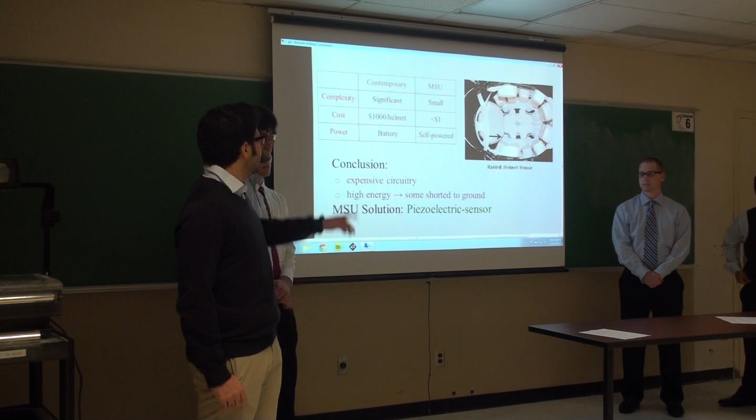Complexity in terms of contemporary versus MSU is very significant, so it's hard to design it and it's hard to maybe analyze it sometimes. MSU's technology is very small and tiny, it's easy to design. In terms of cost, the contemporary is $1,000 per helmet, which is huge. Compared with MSU technology, which is just less than $1, which is a huge difference between both.

And then in terms of power, contemporary uses a battery for power, and this is a negative side because these concussions happen in a short amount of time, and this battery gets leakages. There's more risk of leakages because the acceleration impact increases, and that leads us to high energy. If it's very high, the energy gets shorted to ground.

If you compare it with MSU, it's self-powered. It gets its power from the concussions, and whatever energy is left is just stored. So there is no energy leakage. So that leads us to present the MSU solution, which is piezoelectric sensors. So what does the word piezoelectric mean? The word piezo comes from the Greek word piezein, which means pressure.

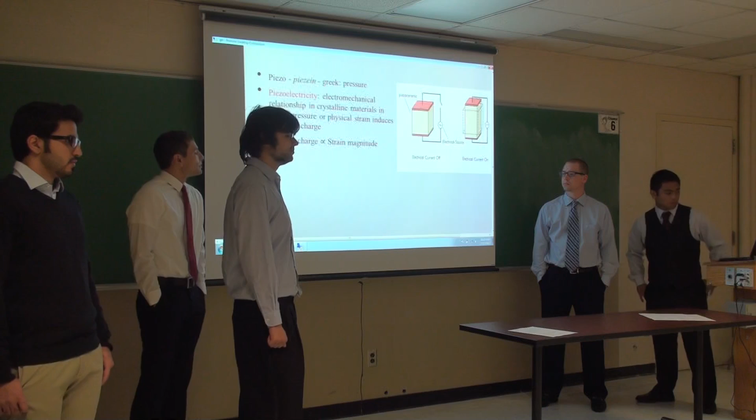The word itself means an electromechanical relationship in crystalline materials, in which pressure or physical strain induces electrical charge by changing the shape and causing electrons to flow. The induced charge is proportional to the strain magnitude. When a current is applied, it causes the piezoceramic over here to change shape, causing current to flow. What happens is you apply force to a piezoelectric membrane, changing the shape. This causes electron flow to create an electrical charge. This electron flow produces current in the device.

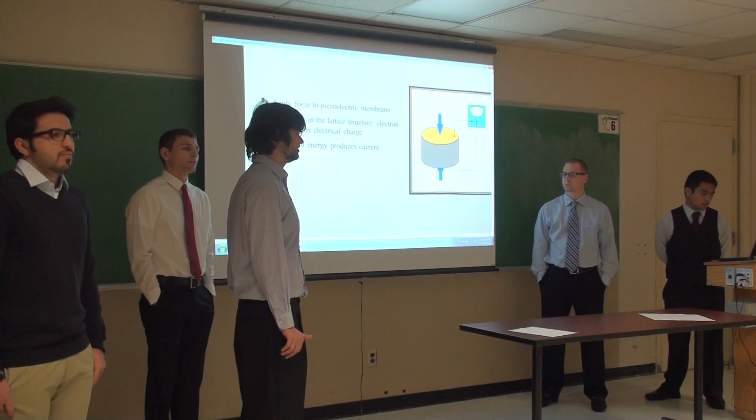So the first circuit we'll talk about is the power circuit. Starting on the left side, you can see the actual current generated by the piezo flows in through here and goes through two current limiting resistors to protect the circuit. Because we want a voltage out that's positive, we implement full wave rectification using 4 diodes. In order for the actual sensor to operate, we need a voltage above about 3 volts.

Anything below this, the sensor will not react, so any noise that you experience with such a sensitive device like a piezo will be ignored. We're only after high impacts, typical of a tackle in a football game. On the graph on the right, you get an idea of the type of voltages that you're dealing with. When the helmet in the study was dropped from 2 feet, you see a spike of about 35 volts. This is well above the 3 volts, but it is also above the maximum voltage that the sensor can handle, which is somewhere in the range of 10 to 15 volts.

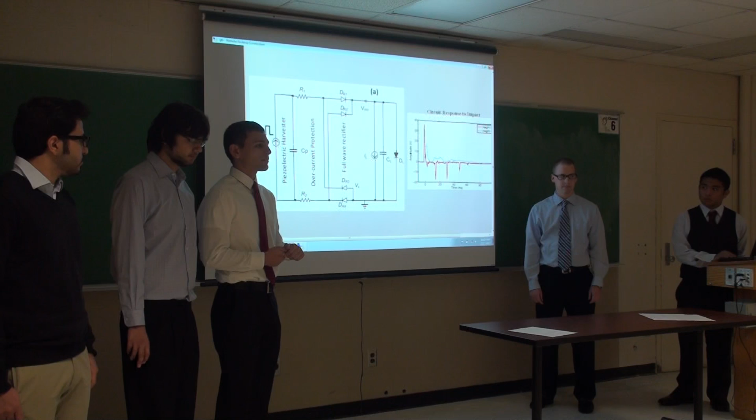When you have a voltage above here, the additional power is dissipated with this Zener diode DL. Because the circuit is not only providing the power, it's also providing the data, if you have power that's being dissipated, you're losing data. So Brent's going to talk about how you fix that using a time dilation method.

So in order to store all the extra energy, they use a method called time dilation. On the previous plot, the voltage output was about 35 volts. So that extra 25 volts of energy would really correspond to data that you'd be losing, which is not good.

So we introduce a circuit that shows time dilation, and how this works is whenever the output voltage exceeds that 10 volt limit, it creates a potential across this series of diodes, so that there will be a potential between the output and the gate of the NMOS, which will then saturate the NMOS, causing the current to flow through CS, which charges up CS. So all that extra energy, instead of being wasted, is being stored in CS.

And so here's a plot of what the data looks like. Plot A is without time dilation, so you can see that at about 10 volts it starts clipping, so you're losing this data. Plots B and C show the output with time dilation, but with different values of the capacitance. Plot B shows a capacitor of about 50 nanofarads, and plot C shows a capacitance of about 0.1 microfarad.

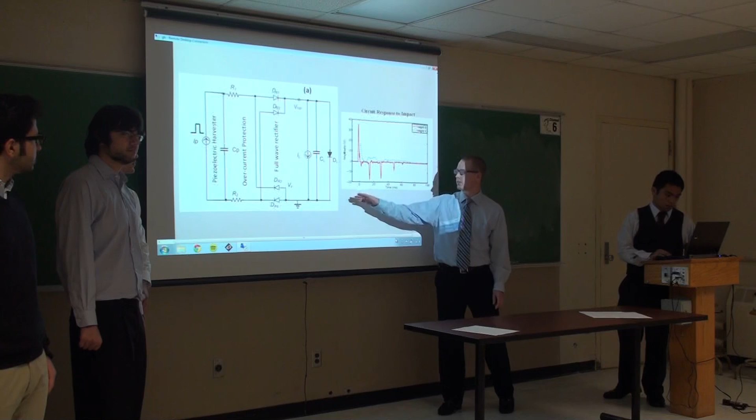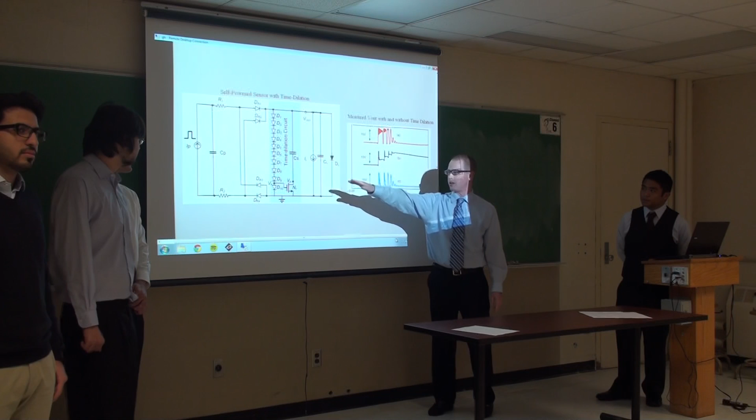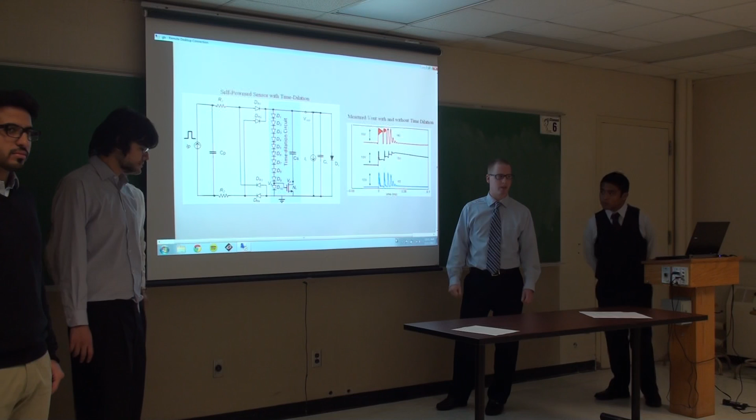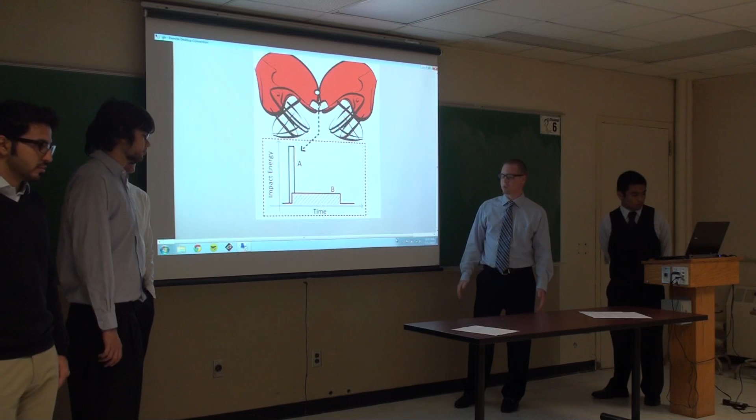So this is kind of what the data looks like. Plot A would be showing what the impulse would look like if it was just measuring the magnitude, and as you saw, they could exceed like 35 or 40 volts, which would fry our chip. So we use this time dilation method, which clips at like the 10 volts, which was the V out, but instead of measuring the magnitude, it measures the time.

So a larger impact will have a longer time versus a smaller impact, which will have a much shorter time. So they're basically just measuring the time that it takes for the capacitors to discharge, and that's how we're getting our output.

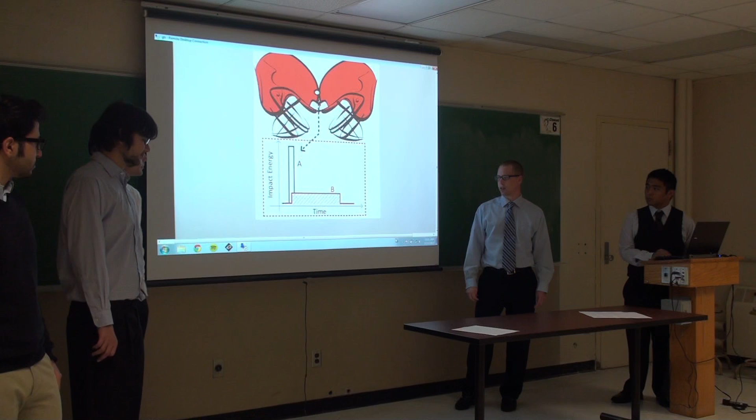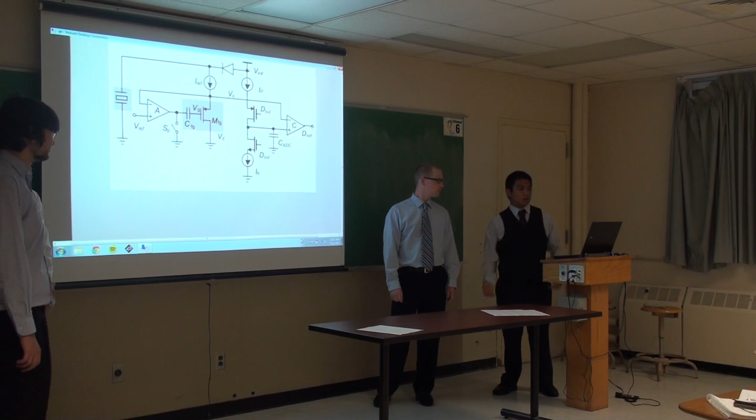Alright, so with all the energy produced from the piezoelectric, we need to store it. The way this circuit works is it takes the energy. What you can see on the left with the op amp and the floating gate transistor, it's set up in a negative feedback configuration, and this ensures that the nodes VG and VS stay at a constant voltage. On the right there, you have the circuitry which compares the reference voltage, which is the piezoelectric voltage, to the charge of the capacitor, CADC.

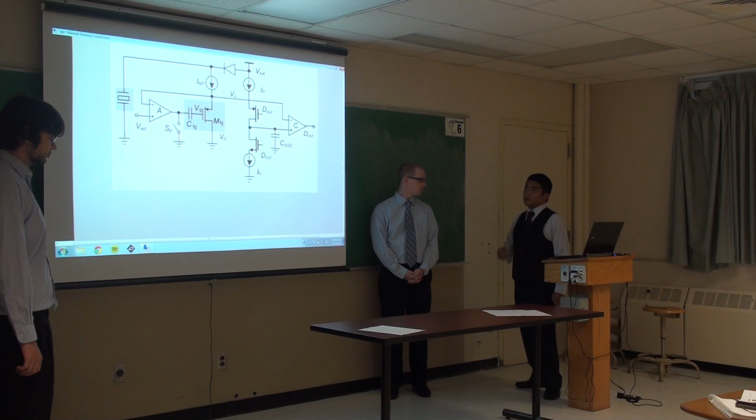And the way it works is the longer the duration of the impulse, what we were talking about before, the more ones will be written. So the comparator will consistently write ones as long as the energy is consistent, and as soon as the energy is gone, it'll write a 0. So what you see in the output is a certain amount of ones, which correlates to the level of the energy.

Because you're working with nanoamps and small amounts of current, the overall size of the chip is very small, and it was manufactured with a 0.5 micron CMOS fabrication process, which in turn leads to the overall size being between 1.5 and 2 millimeters. And due to its size and minimal use of components, this led to a low overall cost of less than $1, possibly even cheaper if more chips are developed.

So some typical applications that it's currently being used: obviously in football you have the kinesiology and the human physiology departments. Currently the sensor is also deployed in the medical field, where elderly with weak skeletal structures can have the sensor implanted into their bones or on their bones, and you could read the data and see the physical strength of the bone, the health of the bone.

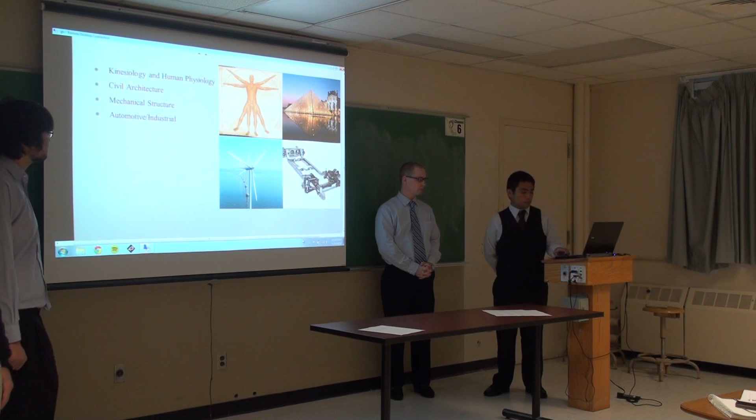What this represents is that the sensor can literally be deployed in any type of structure that you want to monitor, be it the car chassis, or any kind of fabrication process where the product is put through constant pressure or through use. So, in any field like that. So, that's it. Does anybody have any questions? Any questions?

Yes, sir. So with piezoelectric powered circuitry, the only time you're going to get data is when there's a strike to, for instance, your helmet. How do you ensure that you actually get accurate information rather than someone physically taking the helmet and putting it on the ground, or maybe a player slapping another player in the helmet? That would obviously power the circuit.

You can play around with the amount of diodes you use to set your certain threshold levels. For example, going back to what Evan was saying, the minimal voltage required to power the sensor is 3 volts. Well, the more diodes you use, you set a voltage drop to each one. So essentially it's dual purpose. It acts like a filter for, say, when you tap on the helmet, which is irrelevant information, versus a full-on impact. So by adjusting the voltage thresholds, you can essentially calibrate the sensor to any kind of use. Any other questions?

Okay, I have a question for when you first started out with the big picture. We're comparing $1,000 per helmet, and that $1 from the last presentation was per sensor, it's not for the helmet. So your comparison there... The $1,000 was for the sensor, for Riddell's sensors. In the total helmet there's about 5 or 6 sensors. Total sensors is 1,000, only sensors, not for the whole helmet. Because most Riddell's helmets start at a minimum of $100 to well over $600.